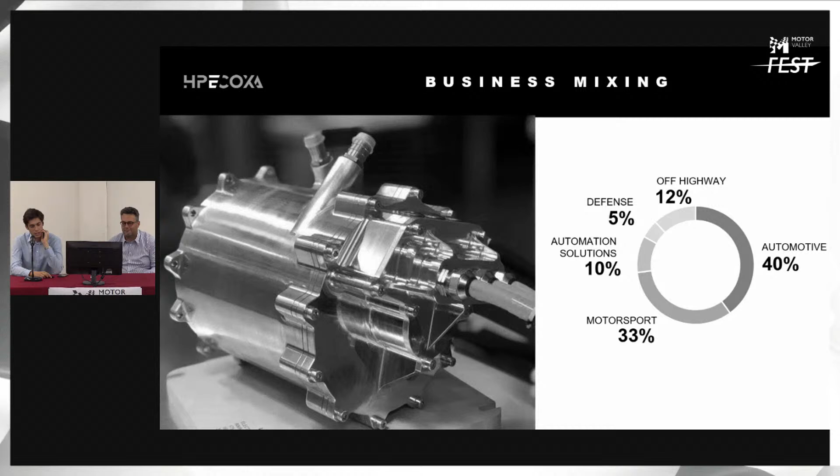We are approximately at 35 million of turnover, and as we can see in the next slide, we are 300 people that work under HPE Coxa. And now we are split in the two main companies that are HPE and Coxa, but we also opened another business unit during the COVID pandemic. This was to, let's say, place in the same area, in the same business unit, all the new technology.

And so we put in this, for instance, simulation, because we really believe that powertrain, but also vehicle approach and vehicle development is really simulation driven nowadays. So we have an office of approximately 50 people that works on simulation.

Then, obviously, electrification was a brand new technology for us. For instance, we need to understand how to play this match of the electrification, and we decided to go to products, especially for electrical machines. And also artificial intelligence was part of this new business unit that we call Evo. It's not a proper company, it's under HPE Coxa, but it's just a business unit in which we split all the people that work on electrification, simulation, and AI.

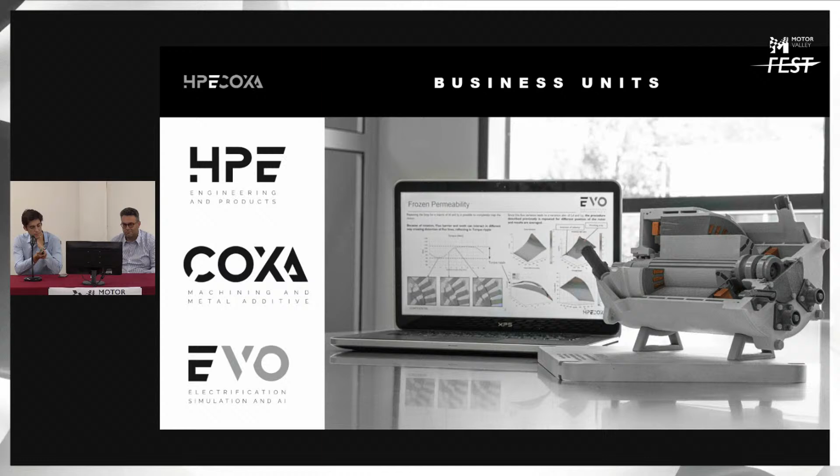The average age of our company is really pushed on the bottom side, so we are approximately at 30 years. We really believe, and I think that this talent work is helping us also to pass the message that the challenge of the carbon neutrality is really placed on the young generation and new generation.

So we really push on having new graduates and people inside our company, because I think that universities also made a lot of steps during these years in evolution, also in terms of courses, training, and so on. They understand that they need to move from some aged courses towards new technology. And so I think that on the young, I consider myself young because I'm pretty much 30 years old, is placed the challenge of the carbon neutrality.

So we really appreciate and we really push on university relationships. I've also prepared a couple of slides on it, because we think that universities need to be part of our company, and universities need to make, with the companies and with the OEMs, the big step to win this new challenge. Electrification engineers are almost 30 people.

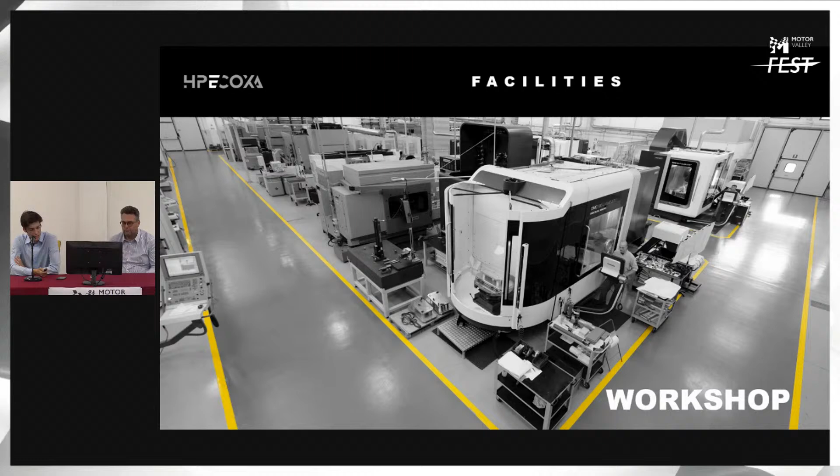Okay, workshop, as I said before, 20 CNC centers. Our core activities, powertrain components. We work with aluminum, steel, and so on. And the last, I think, was this, that I think was a great investment, an assembly lab, due to the fact that for Lamborghini we are currently producing a sort of electrified gearbox for 2 production applications, 2 few-off, and this assembly lab was created to handle all, let's say, the activities about this product,

in which we design and develop a system that helps Lamborghini with this automatic transmission to cover the torque hole given by the fact that it's not a dual clutch transmission. And so with this torque filler, low voltage, we create a sort of linearity during the exchange of the gear, and all the transmissions are assembled and developed by us in this facility.

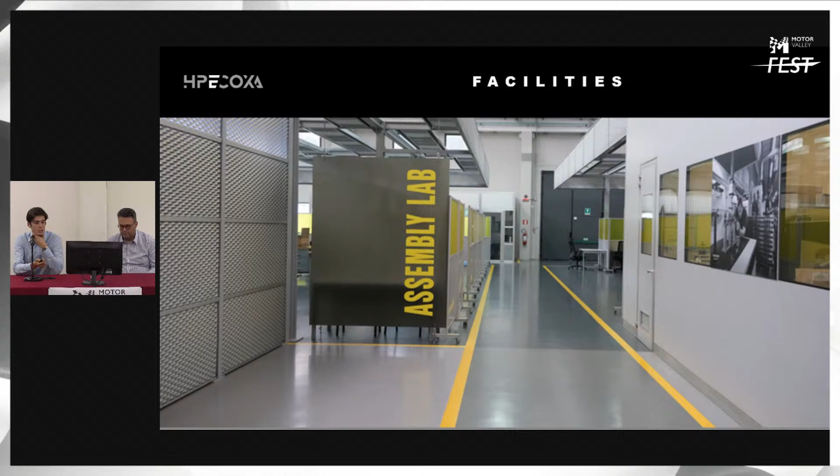Just to spend a last few slides about a project that I'm following with some university professors, this new, let's say, area of the company that we call Link. The aim was to, let's say, handle all the activities about knowledge improvement, about innovation. So we are currently placed on 4 major, let's say, activities. The first one is the relation with the university. We are partner with 5 universities: Modena, Bologna, Pisa, Firenze, Perugia, and we are part of the MUNER.

The aim is to obviously invest money in research, invest money in PhDs, invest money in master degrees, in order to collaborate in a strict way with them. Open innovation, in which this is basically the location of our accelerator. The aim is to handle the relationship with the startups in order to catch any opportunities to collaborate with them, to understand if there are synergical, let's say, activities that we can develop with them.

Then there is the area of the training, and so all the formation plan that I spent some words on before, and then sustainability, because I really think that companies like us need to, let's say, handle all this stuff to catch some investment from the PNRR in order to be competitive and develop projects, let's say, in a sort of competitive funding approach.

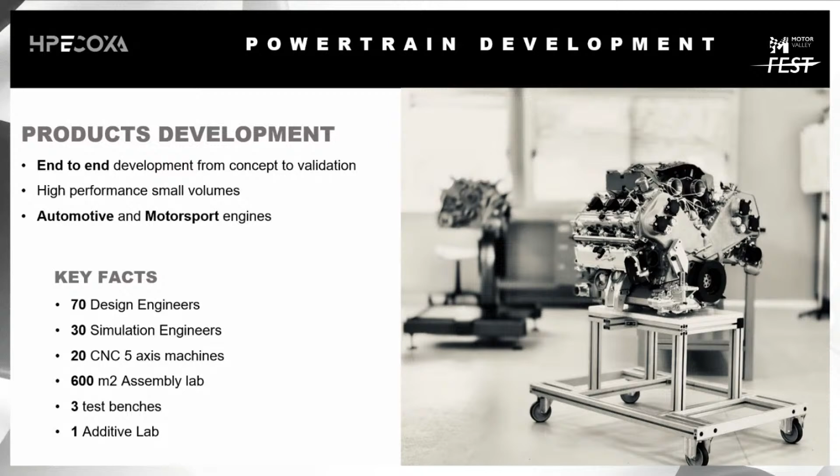About key facts, we are approximately 100 people that handle powertrain, with a lot of simulation engineers merged with design. We have a workshop fully dedicated to powertrain, the assembly lab - and when I say powertrain, it's not just ICE, but also transmission, axles, etc. We have 3 test beds and an additive lab in which we can print different powders for different materials.

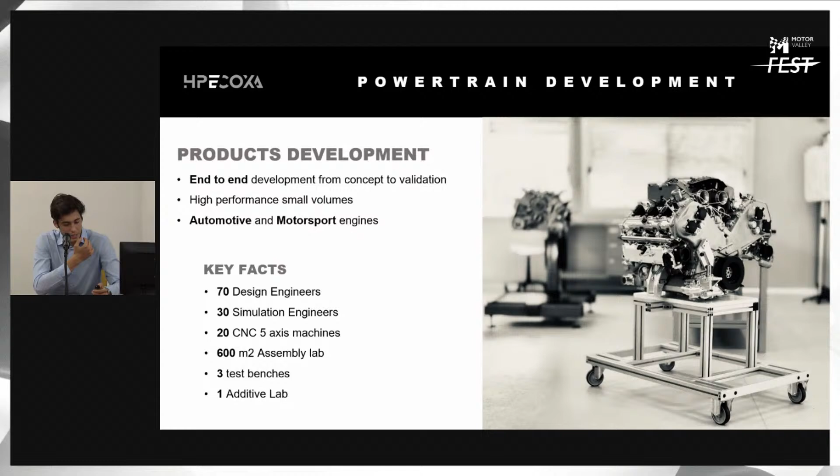Okay, sorry, skipping some slides.

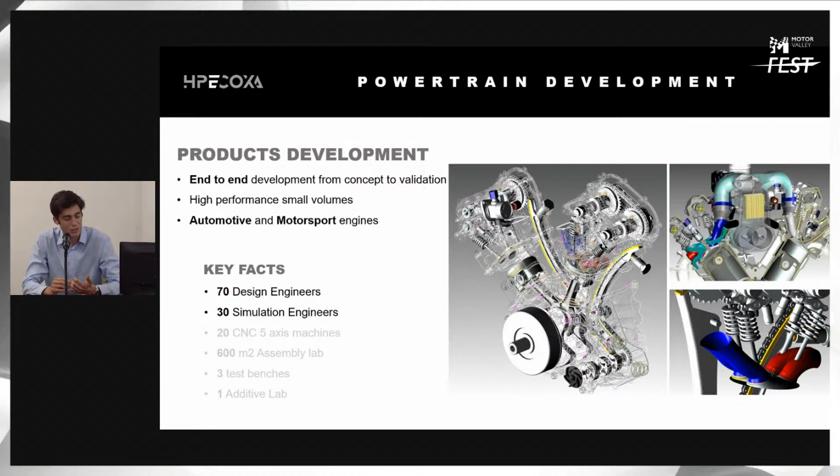A focus on design - working on an end-to-end project is really important to cover all the concept phase in terms of design activity. The approach in IC development changed a lot over the years. We believe simulation-driven is the correct approach, so we spend a lot of time in the concept phase merging our fluid dynamics tools with the concept team design, to have a reliable concept phase where numbers and design parameters come from simulation and not just from expertise.

Simulation is just one pillar - we have almost 13 engineers for ICE plus 15 for the electrical side. The split is really equal to a common office of IC development at other OEMs we work with, so basically split between 1D and 3D. A lot of the knowledge you're currently creating in mechanical or vehicle training courses during your degree is currently covering this type of application.

In simulation, it's really important to be correlated. Correlation and revalidation against experimental data was one of the major investments of recent years. That's why we have these 3 test beds - because to properly design and achieve compact product development without a lot of experiments or a long experimental phase, we need to be really careful with results.

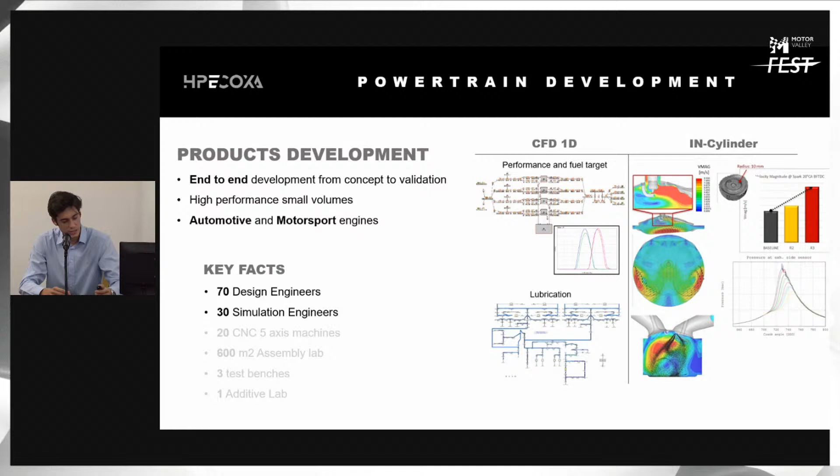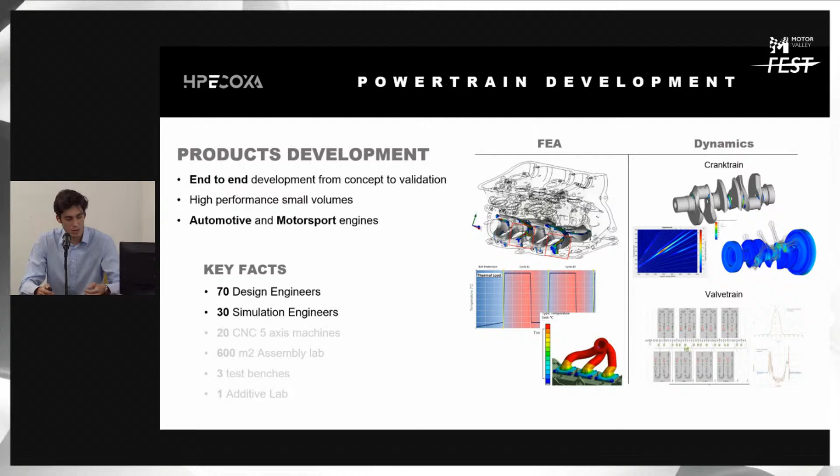Same thing applies for dynamics and FEA - these are common and standard, also for people coming from university. But because we work with a lot of customers, we need to work with a lot of tools. This is the main difficulty, because they are currently forcing us to align to their tools. So we are really wide in terms of simulation activities.

Then there are the 3 test beds I described before. The main investment during the last 2 to 3 years was to make these test beds compliant with high voltage hybrid systems. That's why we're now able to work with P2 application powertrains, or also test in our ICE test bed some EV applications where we test directly the electrical machine.

This chart mainly describes what we are currently doing for motorsport. These are the 4 major activities, but there's also a 5th one - NASCAR - and I think their approach is really quite far from the Motor Valley approach. They're really based on design, making a lot of experience and experimental phases, and they're pleased to work with us to have this virtual approach that they're far from. The other 4 major championships we follow are F1, where confidentiality and exclusivity are the main diktat.

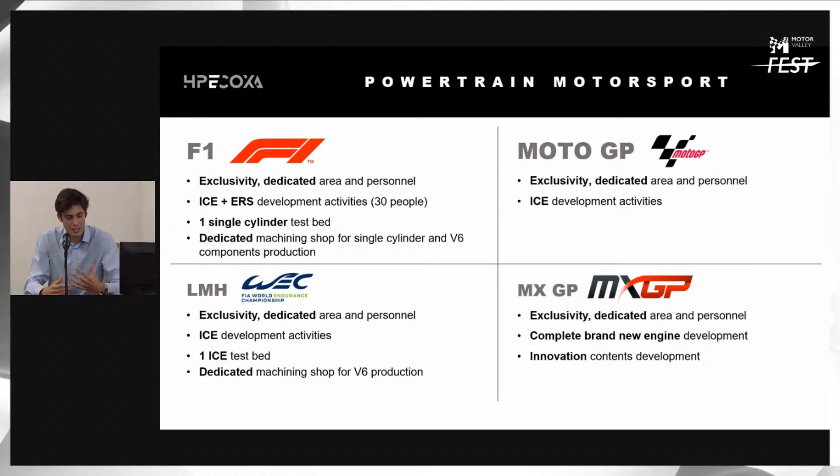I think that MX and also maybe MotoGP are a step back with respect to F1 application, also in terms of technology, and especially for MX there are a lot of improvements that can be done by companies like us that used to work with F1 engine development.

I prepared a chart also for the carbon neutral roadmap. I think that at this stage, as I said before, it's difficult to understand our role. So basically, to not make a mistake, in this moment we are playing a role that I used to call technology neutral in terms of attitude. We think that there could be a lot of different evolutions.

I think that fuel cell could be a good evolution for the transportation sector, and we are developing a POC to assess the complete energy management and concept phase of a fuel cell for a transportation application. We think that H2 will be important, and there was also agreement this morning at the big round table, as I called before with Mattia, in which CEOs of OEMs were saying that maybe H2, with other fuels, could be a solution to avoid losing ICE emotionality and content.

So we are developing with partners that are placed in component development, like injection systems and ignition systems. We are developing a POC in which we are taking a proper gasoline engine, with high power density, so we are speaking about something like 200 horsepower per liter. We are trying to convert and transform this engine into a monofuel H2 engine, in which we can develop combustion system, ignition system, and injection system with partners.

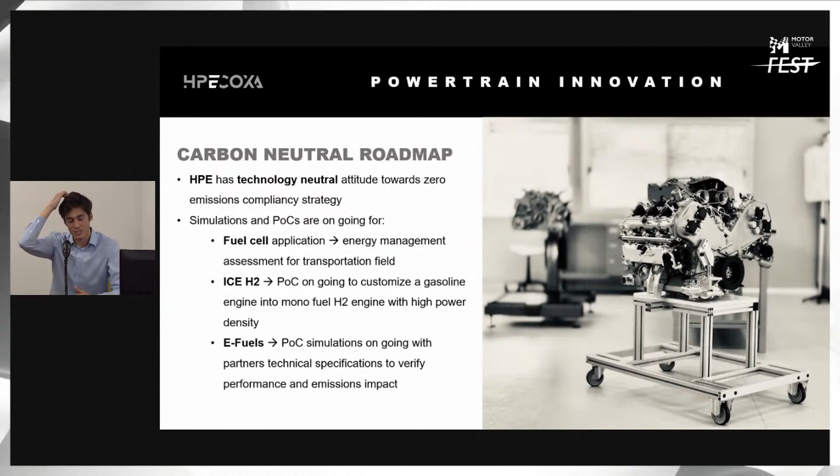And also in fuels, we are working with some fuel producers in order to assess and give them feedback on the direction they are following in terms of fuel production. So we are just a sort of results assessment for them regarding CFD impact, both in performance and emissions.

Let me try to go ahead fast. About electrification, I think the approach is really quite close to that of powertrain. We currently cover different products. E-machines and motors are maybe the crucial one for us. We developed 3 different technologies of e-motors. We are currently developing one SiC application, 800 volt, in terms of CU, so inverter. And we have also developed some e-axles.

I think that hybridization with P4 application will be, especially in supercar and hypercar application, one of the most used in the next, I think, 10 years, before 2030.

We used to work in different sectors. So obviously for motorsport, we are part of the development of the MGU application for F1. We work on super premium, so for supercar and hypercar, but also with some application, one technology was developed for low speed and applications much more compliant to the off-road sector, and then later on also for defense.

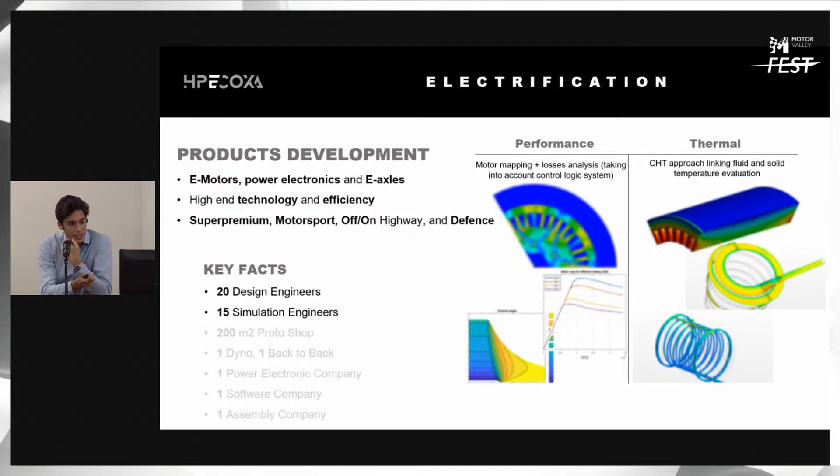For thermal analysis, I think CHT is the correct approach, where you can merge 3D CFD steady state calculation with a direct solid thermal solution. We also do other simulations for mechanical and NVH. I think that's really important for the stability of these products, since nowadays it's not perfectly clear how they will work over aging. So it's really important to properly assess these products from a reliability standpoint.

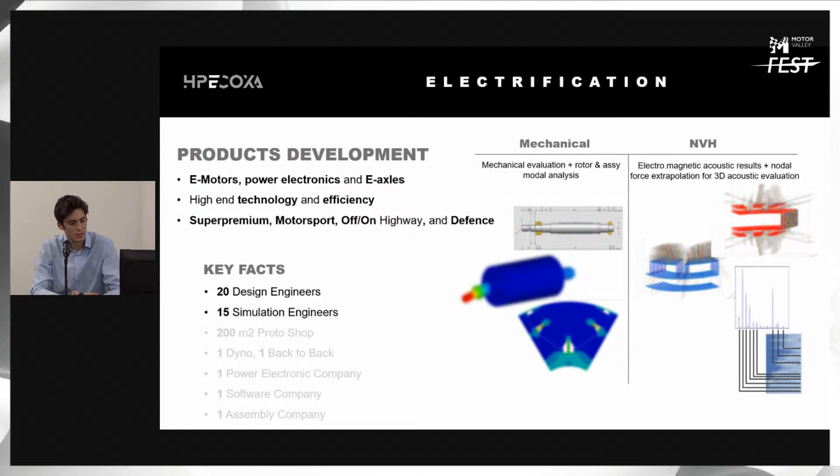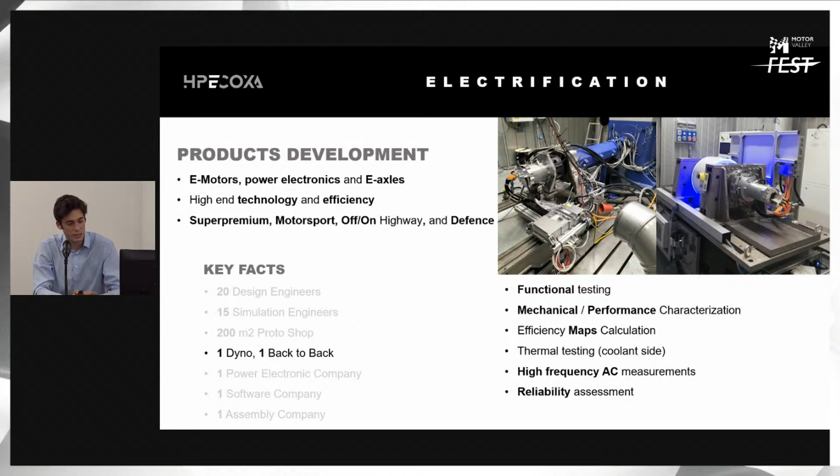Two test beds: the first one is a back-to-back, clear on the right side of the picture, up to 25,000 RPM. The second one is a conversion of an ICE test bed, in which we are currently testing applications at low speed, especially for off-highway transmission. These are the products.

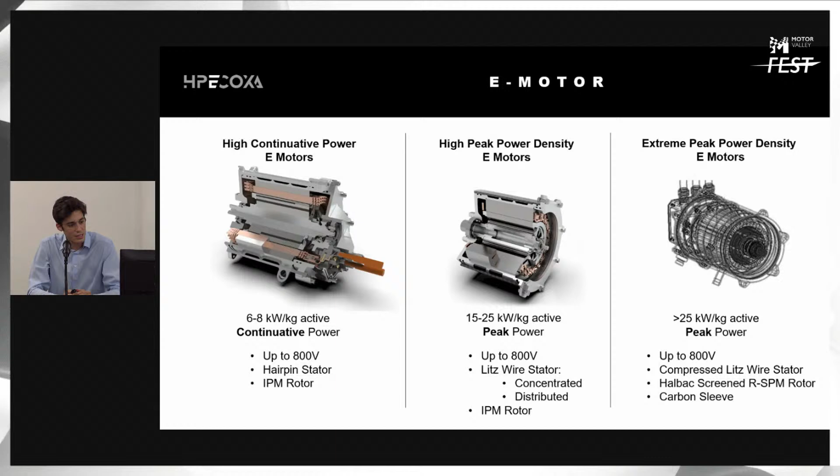Three main fields. The first is used for off-highway applications. We think hairpin stator is the right technology with IPM rotor. The power density is not so high, so we cover low speed and high torque, with a low ratio between kilowatt and kilo of electrical machine, up to technology really close to F1 technology, where carbon sleeve rotor with SPM rotor and Litz wire are currently allowing us to go up to 25 kilowatts per kilo.

Last slide for me is about the axle. First application is the Lamborghini one I mentioned before, the electrified gearbox, where we developed this low voltage system for torque filling. Then we developed a brand new front e-axle without torque vectoring - you can see just one e-machine.

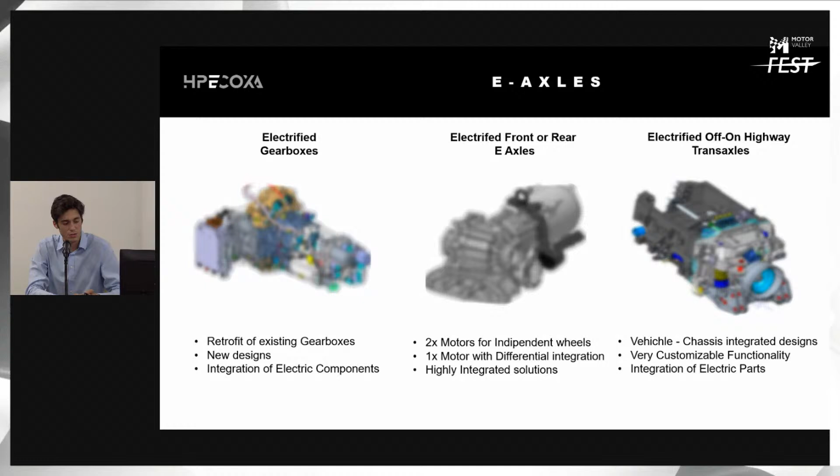Now we are developing a really high premium solution for a hypercar, an e-axle with torque vectoring, with two e-machines driving it, technology really close to the F1 one I mentioned before. The last one is a completely electrified transmission that we developed for CNH, where we were able to integrate in the vehicle and customize the solution with both the component development of the machine and the transmission development.

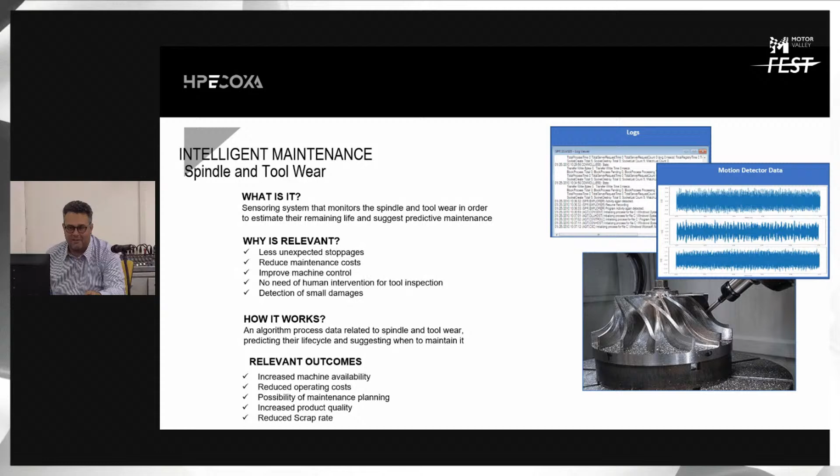Here I want to show some examples of our application more related to the mechanical side, that is our main sector. The first one is related to CNC machines, and is built both for our customers and for our internal purposes. We want to integrate our CNC machines with sensors and software able to anticipate spindle anomalies and tool wear. How it works?

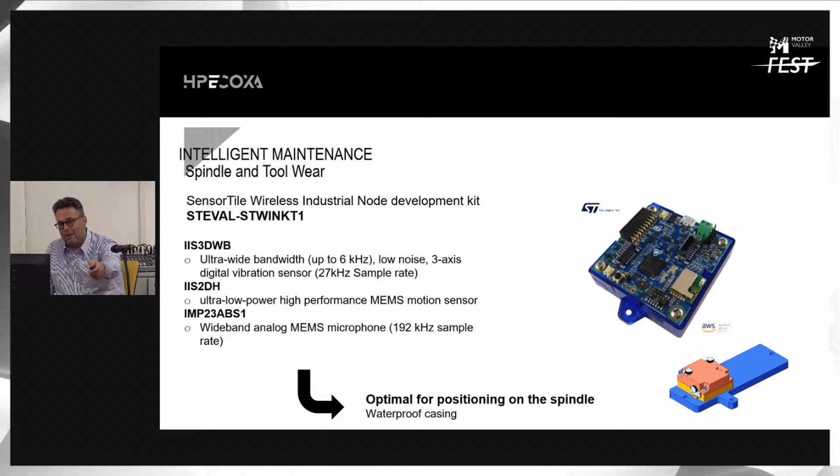We identify a sensor with a PCB board with microcontroller. We build a case for it, and we have positioned it on the CNC machine. We make a campaign to acquire data during the CNC machining phase. And after that we have the data set, we build a software that is able to process all acceleration data and to merge it with the CNC program.

And this software is able, via neural network, to classify when the tool has the right vibration profile, or if a tool has a bad vibration profile that indicates that it is starting to wear. So we emit a warning, and we give our maintenance team feedback so they can manage the procurement of a new tool. And so we minimize machine stops and increase production rate.

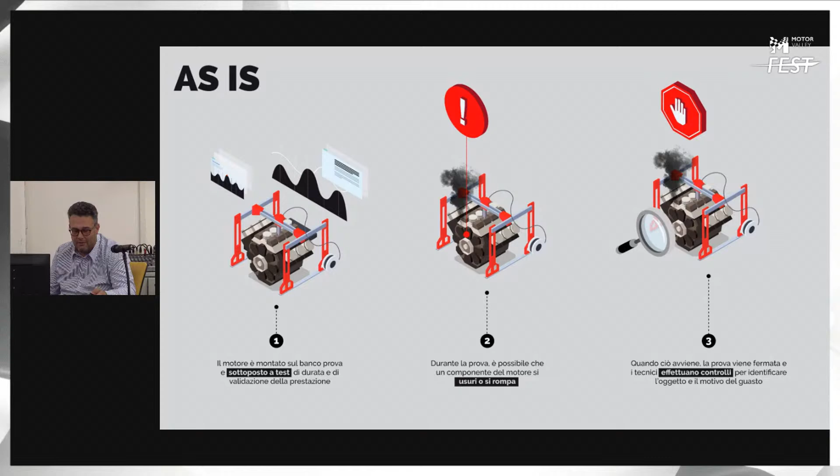Another application is more related to engines. As you imagine, when we are going to a race, we want to be sure that the engine we take to the race is performant and reliable. To make sure of this, there is a long campaign of testing at home. And to support this, we simulate all the races, so Monza and so on. During race simulation, a lot occurs in the engine cycle, and we may experience some reliability problems. Some of these anomalies can lead to engine breakage, and this leads to loss of money, but also loss of time.

So, to be able to avoid this type of problem, we implemented an agent that in real time, alongside the test cell operator, monitors all the signals coming from the sensors and compares them with the expected signals. If the expected signal predicted by the neural network is different from the measured one, the system starts a process to understand what the problem is. And when it identifies the problem, it decides if the test can go on, but gives a warning to the operator, or if the problem has a high risk of severe damage to the engine, and stops the test cell. And this gave us the possibility to save engines and time, and to anticipate problems to solve on the engine.